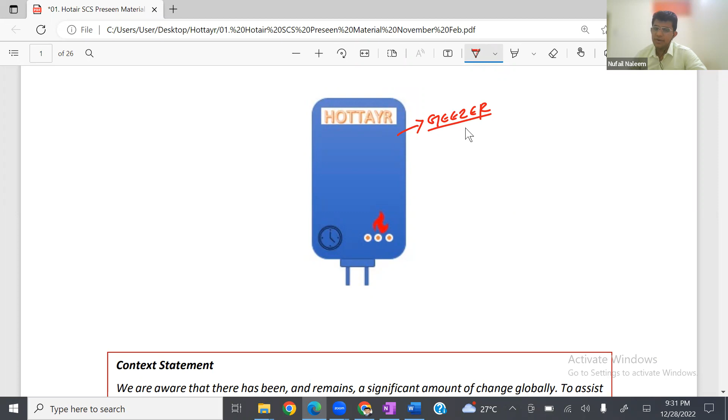So Hottayr, they have given a basic example of a heating system. This is like example, they say geyser. If you see in certain houses, especially in the Asian continent, they have something called geyser. Geyser means it will translate cold water to hot water. It's a basic device, so that is what they have given.

As I clearly told you, they are not wanting you to write anything that is associated with today's world. For example, in today's world we have COVID emerging once again from China, but actually that's not relevant for us, because our main target should be what are the data given. But anything that is relevant, you can write it down for your understanding.

Now students, as I told you, if you see the biggest challenge, if I'm not mistaken, is the explanation of scientific data. If you observe students, in management case study or operational case study, the data is mostly financial data, like statistics, everything. But here they are a little bit concerned about the scientific data also. I'll tell you the reason.

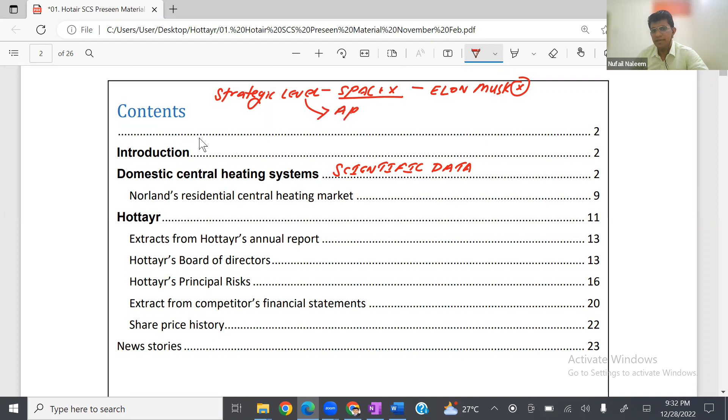If you observe students, in real life at the strategic level, let's assume you are working in the strategic level for SpaceX, which is Elon Musk's company. When you are working in SpaceX with Elon Musk, you need to at least know a basic idea of what work you are doing, so that the management will be comfortable with that. And similarly, even if you are working for someone like Apple, Steve Jobs or Tim Cook or anyone, you need to know about the scientific data as well. And don't worry students, scientific data doesn't mean that you need to be a specialist of science or anything like that.

So students, I'm going to go through this in detail. Now, introduction: Hottayr is a quoted company that manufactures domestic heating products. So once again, it's very clear it is a quoted company that manufactures. Understand it very clearly students, manufactures, that means they produce domestic heating products.

Now when it comes to manufacturing sector, the biggest challenge in manufacturing sector that we always know is pollution. Now you need to be having some awareness about pollution, students. And if you don't mind, I'll write down a small technical area that you can revise at the moment, that is known as IR, stands for Integrated Reporting. Students, I will guide you on this topic, don't worry, but please write these topics in a paper or something, because integrated reporting has been tested in the examination for the last time and the previous time also. So have an understanding of this.

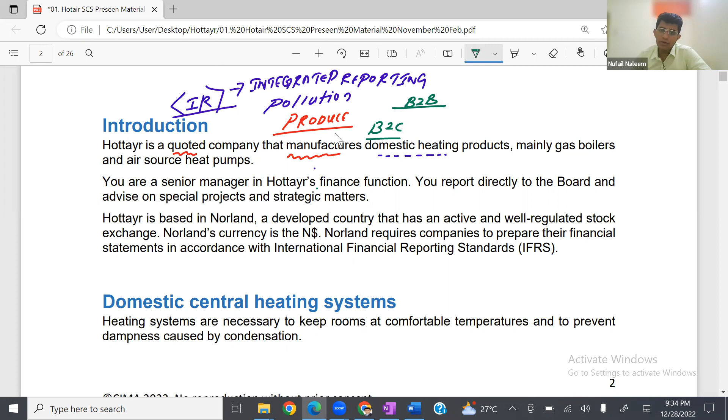And also students, just make sure that we will complete this SWOT also, and domestic heating products. So it is very clear that they are targeting the domestic heating only. That means they are not at all targeting the corporate, or I can say the industrial heating, because B2C, in simple language, means the product is effectively going to the consumer. But there can be B2B also, if I'm not mistaken. Instead of domestic heat, you can also make industrial heating system also. Industrial heating system is also possible in that aspect.

Now, mainly gas boilers and air source heat pumps. So these are the two products that they are selling at the moment. One is the gas boilers and the other one is air source heat pumps. Observe it very clearly, students. Technical term is air source, that means these heat pumps generally consume air and then only create the heat. So students, it's air source heat pumps.

Now students, have you heard something called air quality? I think Mr. Keetheeswaran would have experienced in Sri Lanka recently, the air quality reduced. Can you remember, Mr. Keetheeswaran, if I'm not mistaken? So what happens is these heating pumps will generally take the air from the atmosphere.

If the air is polluted, can there be a chance that the household also may get polluted air inside? Yes sir, if the air quality is bad, like in Delhi during this December time, the air quality will be extremely pathetic because of the farmers burning their harvest.

So students, can I get a confirmation from you all in the chat box if you are able to understand these things? So what I will do is write it down, and I'll do a very short SWOT. In case if I miss something, please let me know. So I'll write down here, quoted company is one thing.

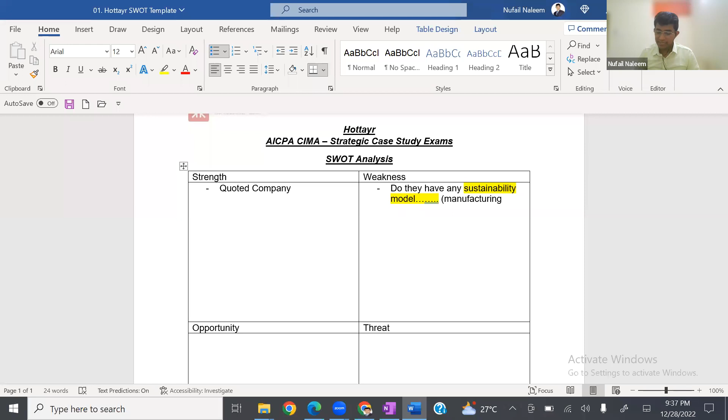And the next thing, I'll write down within bracket, manufacturing, because that is very critical students, because they are just giving factory data only, but they have not given any specific data going into detail of this. And one more weakness I can only say is only two ranges of product portfolio at the moment. So that is a dependency threat, I can generally say, only two ranges. So they will have a bigger challenge also, if I'm not mistaken.

Now if you see Honda, they have motorbikes, cars, scooters, so many varieties. But if you look at a company like Volvo, they generally have bus and I can say car. You get the point, students? So get the understanding, they need to have a more detailed aspect of that.

So you are a senior manager in Hottayr's finance function. I'll just underline this term. You are a senior manager, Hottayr's finance function. You report directly to the board and advise on special projects and strategic matters.

Now students, since I think one student has gone through the case study material properly, they have revised the past papers also. You need to refer the past paper, students, at least one past paper minimum. One question and answer also, you will understand a huge thing. So students, if you see, you are whom? You are senior finance manager.

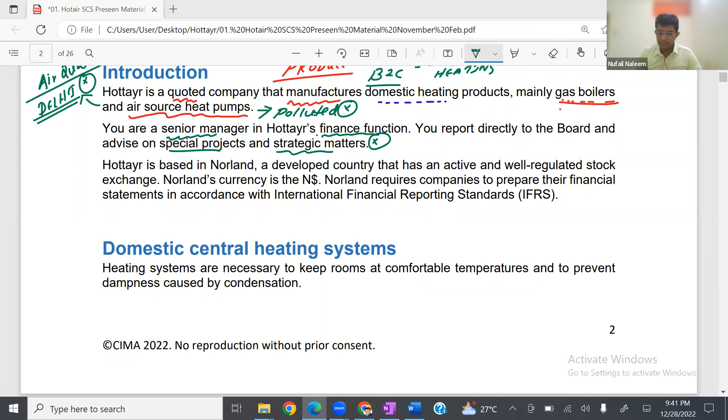Now, if you observe, Hottayr is based in Norland, a developed country that has an active and well-regulated stock exchange. Norland's currency is in dollars, and Norland requires companies to prepare financial statements in IFRS. So, one opportunity is that Norland is a developed country.

Now one threat in a developed country is more compliances and regulations. Norland may have more compliances and regulations. In a country like India, there are fewer regulations or compliances. So the downside risk of a developed country is more compliance and regulation. The biggest challenge in a developed country is more compliances and regulations. Even in the UK, the regulations are very high and it's not easy, if I'm not mistaken, Priscilla? That's correct, sir.

That's the downside risk of a developed nation, because it's not so attractive for a business. Now, domestic central heating system - understand this very clearly, this is industry analysis. Many students think industry analysis means doing real life industry analysis, but no, you need to analyze the data given specifically on the industry factor.

Domestic central heating system. In certain auditoriums in India, you will observe air conditioning attached to the ceiling - that is centralized air conditioning, where you control the temperature by one controlling system. Here the logic is the same, but instead of giving cold air, it gives warm air. Are you understanding the linkage between an AC and a heating system? Especially Asian students, make sure you understand this way of thinking, because it's the same logic as an AC, but here it is application based.

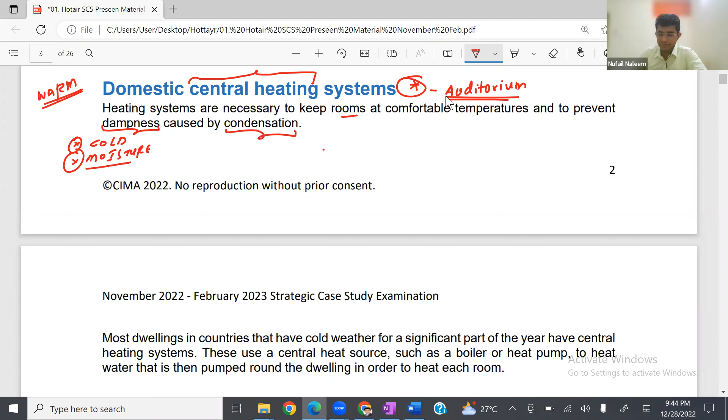Heating systems are necessary to keep the room at comfortable temperature and to prevent dampness. Dampness means it becomes extremely cold and moisture takes place, so everything becomes wet. For example, during extreme rainy times, you will see the windows have mist - that is the dampness caused by condensation, meaning excess moisture in the air.

Most dwellings means houses, students - see how they complicate the language. Dwelling in simple language means houses, apartments, all those things. In countries that have cold weather for a significant part of the year, they have central heating systems. These use a central heat source, such as a boiler or a heat pump, to heat water which is then pumped around the dwelling in order to heat each room.

Now I will explain this idea very clearly. Have you heard of the scientific concept called the water cycle? In the water cycle, rain takes place - let's assume this is the cloud, the rain flows into the earth, and from the earth the water goes to the sea. From the sea, there is sunlight, and this sunlight turns it into vapor, water vapor, and the cycle continues.

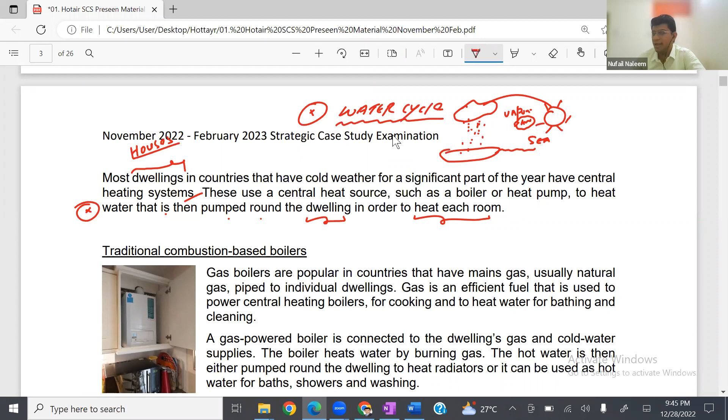So in simple language, students, the water heating system follows the same idea as the water cycle - can I get a confirmation from you all in the chat box? It's a direct replication of the water cycle scientific theory - it's just heating and circulating that moisture.

Now, students, coming to traditional combustion-based boilers - the word itself is traditional.

When you see the term traditional, the biggest risk these things are facing is updates of new technology. There are new technologies coming to the market, so there are updates of new technology also.

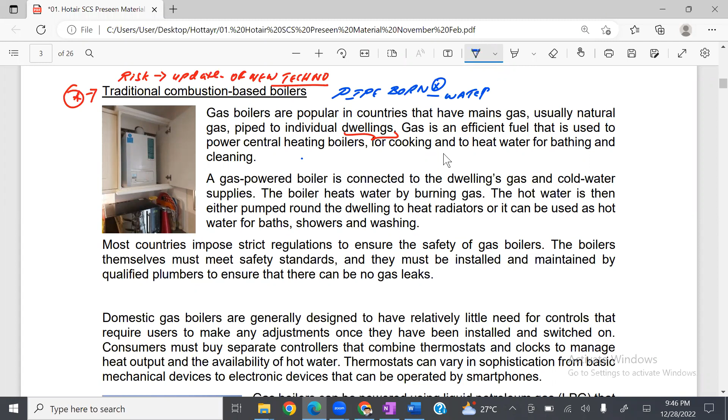Gas boilers are popular in countries that have mains gas, usually natural gas, piped to individual dwellings. In Asian countries we have pipe-borne water, meaning houses have a direct water connection through a central pipe. Similarly, in developed countries they have special gas pipes bringing gas to houses. In Asian countries we mostly use gas only for cooking, but in Western countries or places facing cold weather, they also use gas for heating purposes.

If you go to places like Nepal or Shimla, cold regions, you'll see people using a small gas cylinder to generate heat, since facilities are limited there. But in countries like Russia, Ukraine, and Western countries like the UK and America, they have proper central heating systems.

Gas is an efficient fuel used to power central heating boilers, for cooking, and to heat water for bathing and cleaning. These are the main purposes. Gas-powered boilers are connected to a house instead of just a dwelling, along with gas and cold water supplies. The boiler heats water by burning the gas.

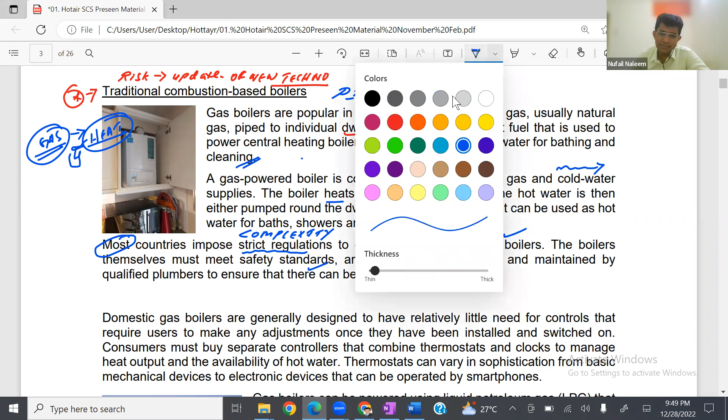There is complexity to ensure the safety of gas boilers. The boilers themselves must meet safety standards, and they must be installed and maintained by qualified plumbers to ensure there can be no gas leak. As per our track record, do we have any gas leaks recorded till date? No.

But can there be a gas leak because of unqualified plumbers, since the market can always shift? There can be a situation with unqualified plumbers leading to a gas leak. Is that a sensitive issue? Yes, a gas leak is a sensitive issue because the entire house can blast as well.

Gas leaks can occur due to poor industry standards. I mentioned developed countries have more regulation, so the heating industry is highly regulated, meaning not everyone can start this business. If you want to start this business, you need very strong standard compliance.

Domestic gas boilers are generally designed to have relatively little need for controls requiring user adjustments once they have been installed and switched on. The main reason is it is centralized, so there's no need to work so hard.

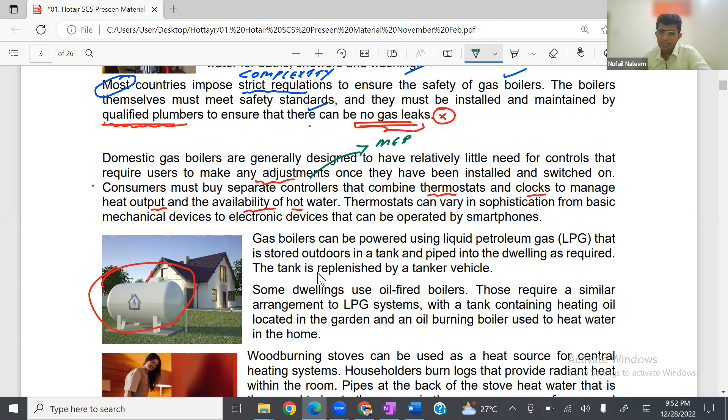And students, have you heard about something called IoT? What is IoT, students? Internet of Things. That means you use Bluetooth technology and Wi-Fi technology to connect devices and integrate devices. Correct, Anushka? Yes, sir. So Bluetooth and Wi-Fi.

Now, students, can there be a situation where controllers can be downloaded by an app? Possible or not possible, students? Of course, right? You can control it from your mobile phone also. So students, if you do not mind, can I write it down so that it will be very clear for you all?

So one opportunity is we can acquire a heat control company, and also we can develop our own heat controller. Can you remember, Monica, there was a case study called Frinta?

I think you did that, right? Management case study, your one was Frinta? Yes, sir. In Frinta, they produce what? Heat controller, sir. But they don't produce the heat. Are you now clear?

Yes, sir. So super. Were you able to integrate this point in your initial reading? Yes, sir, I did. I wrote how we could start our own, like instead of acquisition, I wrote how we could start our own. Internet of Things, everything came right into the mind.

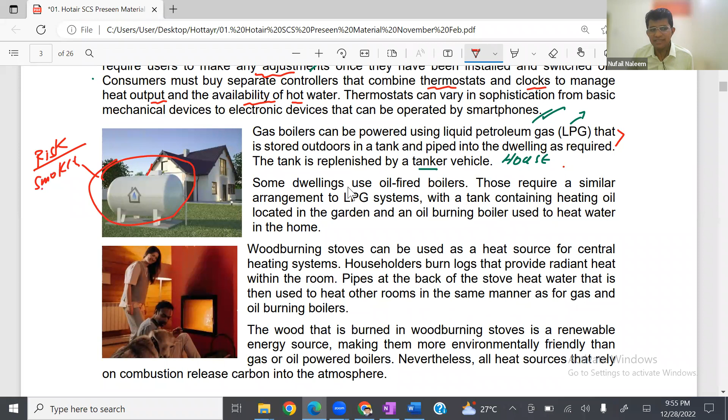And I want to ask a question, students. Now, this is kept outside, right? So there can be risk also. Example, Anushka, let's assume someone smokes and just puts a cigarette by mistake from somewhere, and there is a chance this can burst. Burst, possible or not possible? Possible. In that case, are we liable or is someone else liable?

Now something happens like that. A very strategic question. First they'll blame us, sir. Definitely. So students, can I write down, if I'm not mistaken, third party accidents can happen to the gas boiler outside the house.

Students, this is a very different case study. I believe many people are having an eye-opening session today, getting that thinking very clearly. Some houses, I am always transitioning the dwelling into houses, use oil-fired boilers. Those require a similar arrangement to the LPG system, with a tank containing heating oil located in the garden, and an oil burning boiler used to heat water in the home.

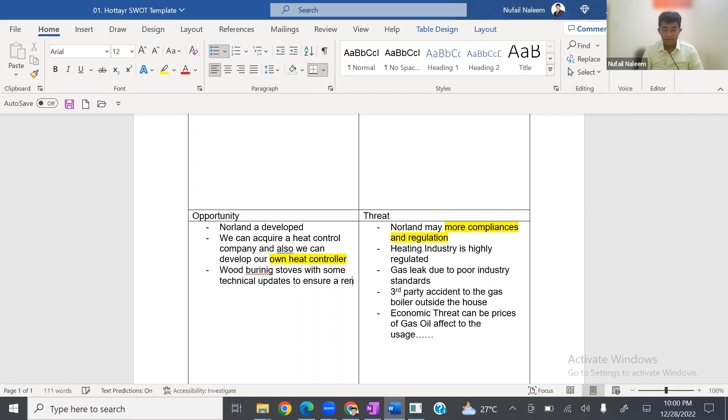So can I write down one thing, if I'm not mistaken, students? One opportunity we have is wood burning stoves with some technical updates. We can have some technical updates to ensure - I can specifically write down here - to ensure a renewable energy process. Renewable energy process. Students, are you clear with that point of view? Can I get a confirmation from you all in the chat box if you got that point? So that is one opportunity. Actually we can target this also - we can promote it as integrated reporting, CSR activities, something like that, and we can effectively go forward. So that is one factor.

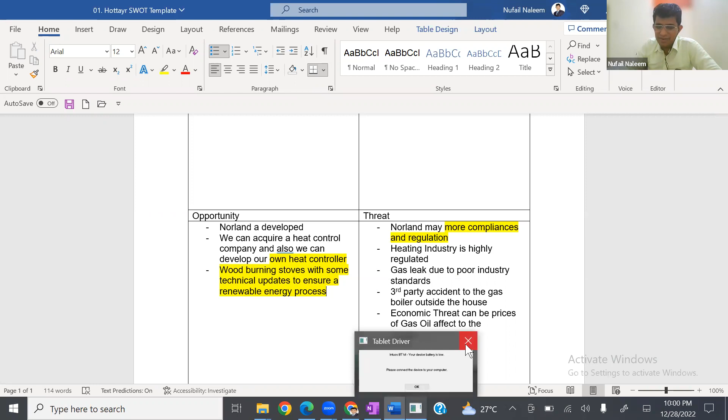Now students, coming forward, going to the next one. Sir, I didn't understand, could you explain it? Yeah, now if you observe, it's very clear that wood burning stoves are renewable energy. Yes sir, gas is not a renewable energy. Gas is a thermal energy. Thermal energy means once you use it, you can't use it again - like petrol, once only you can use. Okay, but here they are saying wood burning stoves are renewable energy.

But are we having wood burning stoves at the moment in our portfolio? No sir. So can this be another opportunity for us to go forward in business? Yes, and also this can be a marketing tool also, where we can attract many people saying that we are having a renewable energy source rather than a thermal energy source. Students, can I quickly get a confirmation from you all in the chat box if you understood that basic point of view?

So frankly speaking, until now I can say this industry is a complicated industry, not an easy industry - very tough and highly regulated industry. Distributing heat around the homes, how it works out - now only they are using the term homes. A network of pipes made from either copper or plastic carries hot water from the boiler to each room in the dwelling that is to be heated. So in simple language, students, it is having a fully heat-resistant system where the pipes are carrying the water for the heat, because the water is only getting evaporated and giving off the heat.

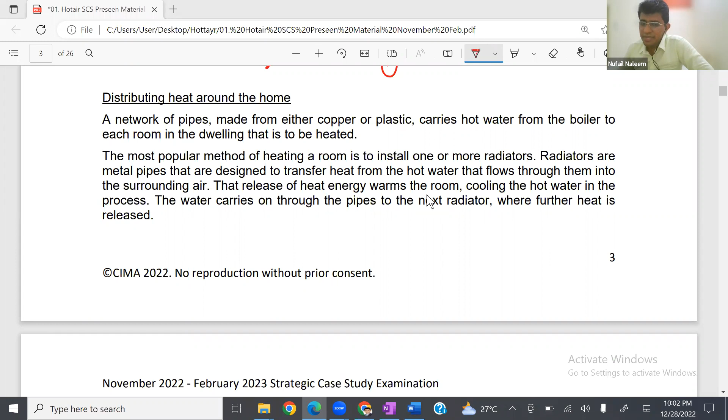Most popular method of heating a room is to install one or more radiators. Radiators are metal pipes that are designed to transfer heat from hot water that flows through them to the surrounding air. Now, my question once again - do we produce radiators in our company? No sir. So students, can I write down - no, we don't produce radiators. Can there be a situation, Anushka, our product is wonderful but the radiator is horrible? They are not getting sufficient heat. Can there be a situation like that? Of course, yes sir. So students, if you don't mind, can I write down one more point if I'm not mistaken?

Problems caused by the radiator. Students, are you understanding what I'm saying? Affecting the reputation of - I can generally say - the Hottayr. Students, look at the way it is going forward. Can I get a confirmation from you all in the chat box how it is also done? And one more opportunity we can have is production of radiators.

Or another thing is, can we have a JV, a joint venture, with a good radiator? So, one more thing: we don't produce controllers, we don't also produce the radiators. So there are situations where these things can happen as well.

Now moving into the detailed aspects, the release of heat energy warms the room, cooling the hot water in the process. The water carries on through the pipes to the next radiator where further heat is released. So students, understand it clearly: the pipes are like this, inside the pipes there is a radiator, this will boil the water, and then again there will be another radiator in the room, and it will boil the water.

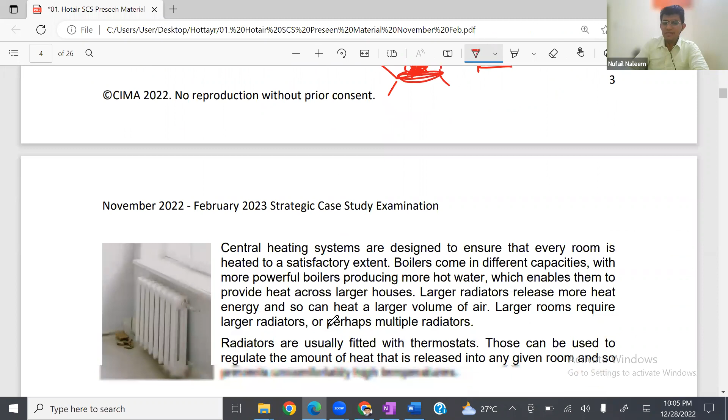So coming to the next one: central heating systems are designed to ensure every room is heated to a satisfactory extent. Boilers come in different capacities, with more powerful boilers producing more hot water, enabling them to provide heat across larger houses. Larger radiators release more heat energy, so there can be heat across larger areas. Larger rooms require larger radiators and perhaps multiple radiators. So the problem is, bigger the house, bigger the carbon emission.

What do you think, students? Yes or no, bigger the house, higher the carbon emission? Do you agree with me, Anushka? Yes. So students, understand it clearly: bigger the house, higher the carbon emission. I believe everyone is getting this understanding very clearly.

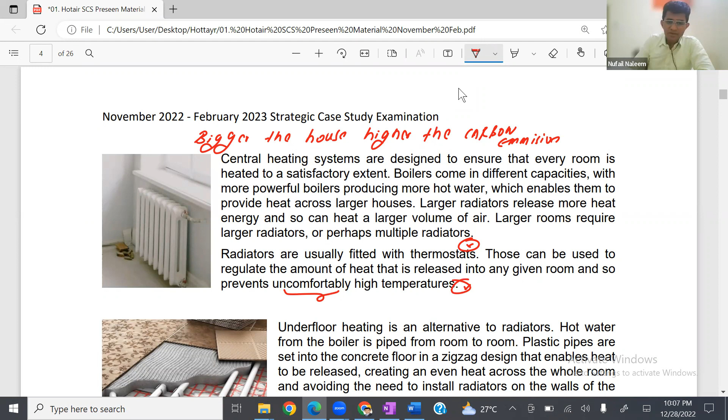And radiators are usually fitted with a thermostat, as I told you, that is the controller. This can be used to regulate the amount of heat released into any given room, to prevent uncomfortably high temperatures. So students, that is the effective application of this. So I'm going down, these are the pipes, I believe you can see this, this gives the heat.

Example, Anushka, in your house have you opened your oven? Have you seen an oven? Inside the oven, have you seen these items? I have seen, sir. This is what I can call the regulators. Students, can I get a confirmation from you? If you have an oven in your house, observe how the oven gets heat. The oven has the same devices. Get it very clearly, students.

Technological analysis: now students, I'm going to cover underfloor heating, which is an alternative to radiators. Hot water from the boilers is piped from room to room. Plastic pipes are set into the concrete floor in a zigzag design to enable heat to be released, creating even heat across the whole room and avoiding the need to install radiators on walls. The pipes are embedded in the floor, so they cannot be seen and can be walked across without causing any damage. The floor can be covered with conventional floor covering, although carpet tends to insulate and so reduces the heat effect.

Now, one thing I am observing, Anushka, and I think Reshma also can observe, these facilities are only applicable for very rich people. What do you think, Anushka? In practical terms, do you think every house will have the affordability to go to these ranges of technological heating systems? Frankly, I don't think so.

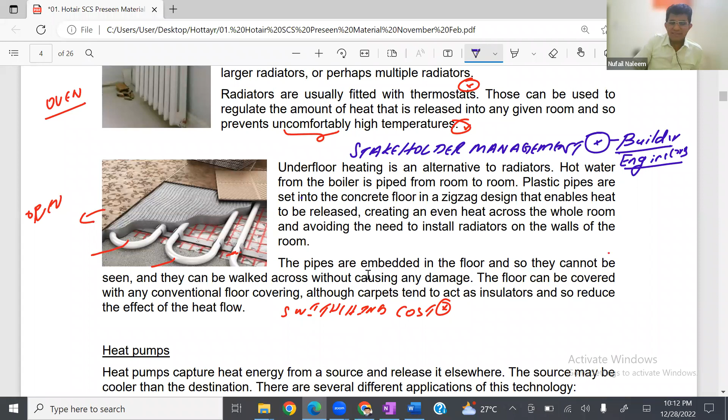And that is the biggest thing I can generally say. So I'll just write down another point of view, if I'm not mistaken. Another - I can be very practical in this case - is generally, since the process of heating facilities are complicated, the customer rarely switches.

I will give you a very, very Asian example. Now, Anushka, have you observed bathware in houses? Like bathware, the tub, the comfort. Do you think people easily switch that, or they keep it for a long time, right? If I'm not mistaken, costly also, very expensive also. So that is the understanding.

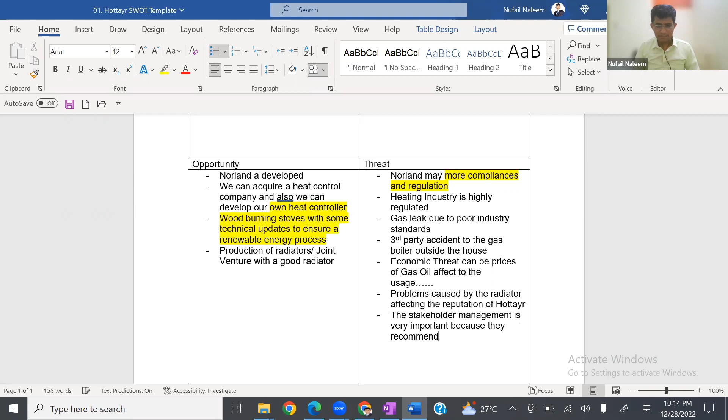So students, and one more thing, if I'm not mistaken, I'll just write down another thing: the stakeholder management is very important. It's very important because they recommend the products. Now, Anushka, in simple language, cement - you are building your house.

The cement industry - I am 100% sure 70% of consumers don't know cement. This goes with the builders only.

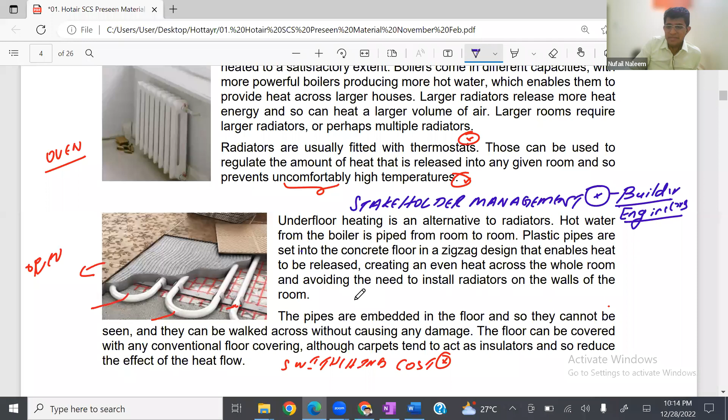So students, we are effectively done with the heat boilers. I'm going to go for the heat pump now. Are you okay with the heat boilers? Can I get a confirmation from you all in the chat box? Students, I want to do a small summary, if you don't mind.

So I'm going to write down here product decoding, because you need to know a little bit of the product information. It will help you to think a lot - that's very, very important. So I'm going to go with the first product decoding.

What we are going to do is the gas boilers, correct? Now understand it very clearly. Gas boilers - if you observe, gas is the source of energy, but we have alternatives for gas boilers, that is oil boilers. Agree? Alternative for gas boilers is oil boilers.

So students, I'll write down here another term for alternative, oil boilers. Can I get a confirmation from you all if you are clear with that point of the oil boilers? And one thing I told - economic risk is affecting these main things. Gas and oil is not produced in our country. We don't have energy sources as per the information given. So understand it clearly, high emitting it is.

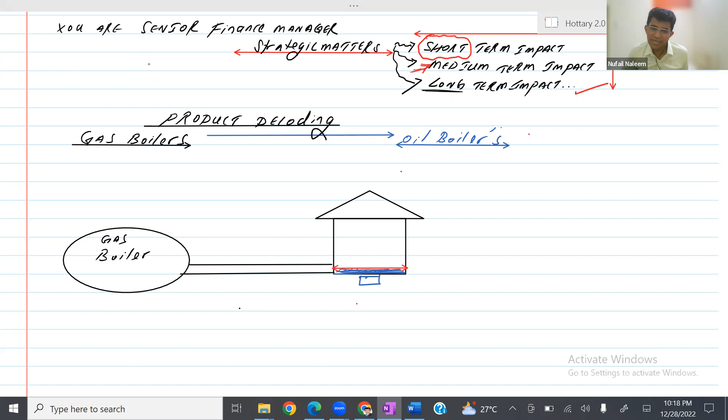Now students, understand it very clearly. There needs to be a regulator. Regulator is the device that will segregate water and heat, balance and generate heat capacity - it is the energy developer. Water will be there, gas will be flowing, but this device will control it. And every house will have a thermostat. This is the controller. So this is how the process works and the heat energy is developed.

Now, if you observe, our company only produces gas boilers. And if you observe in this case, this is independent, correct? And even the controllers are independent. Students who have done MCS, this is only thermostat - this was the case study that you did earlier. And again, these are independent students. And another best way is something called wood burning stoves.

So I'll just write down in the corner, wood burning stove also does the same thing, but instead of gas, what do they use?

Instead of gas, wood will be used. So I'll write down here: wood burning stove.

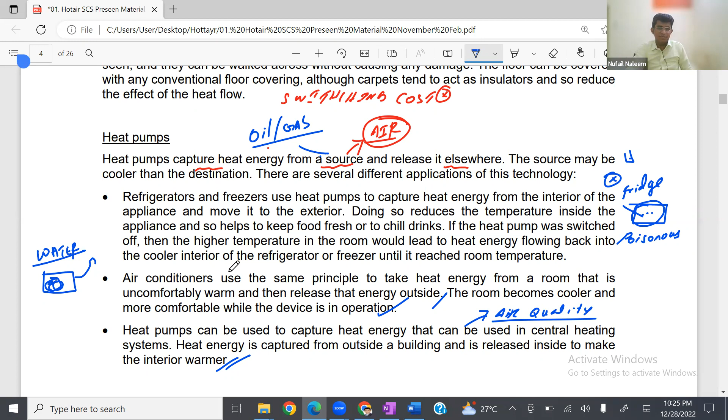Heat energy is captured from outside a building and released inside to make the interior warmer. Now, the problem is when you capture heat from the outside, what about the air quality? There is a technical risk. If the air quality is good, like in the UK, that's completely fine.

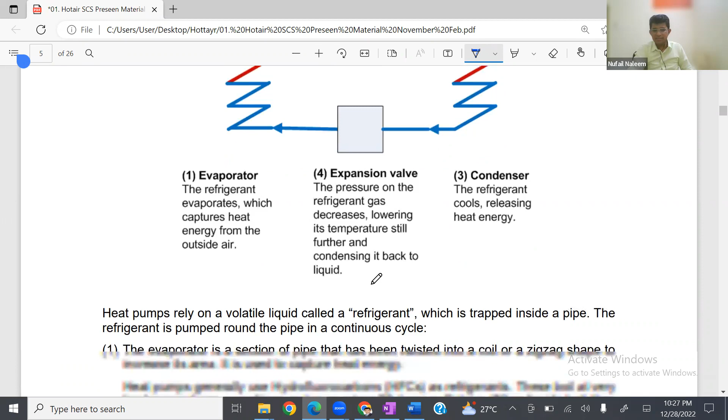So students, the biggest challenge in this process is: is it possible to capture heat energy in winter? Are you understanding what I'm saying there, students? Are you getting the point of view? Is it possible to capture heat energy in the winter? Are you understanding the biggest challenge that we are having? So students, get that point of view, because in extreme cold, I don't think it will be possible. Students, can I get a confirmation from you?

So students, can I quickly get a confirmation from you all in the chat box if you are getting some basic point of how the process works out? Thank you. So, could you just explain how the evaporator works, sir?

Okay, the first one, the evaporator. Now what happens is I'll guide you very simply. Let's assume you have drinking water. Water is liquid, correct? If you put water into the freezer, what will happen? It will freeze and become solid, an ice cube. And the ice cube, what happens is, students, it ends up as solid.

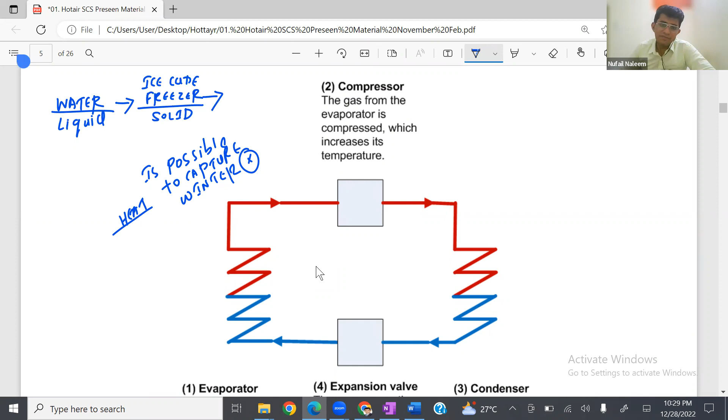And then again, you take it out from the refrigerator, and it again becomes water, correct? Are you clear with that?

Now the same water, if you heat it, it ends up as vapor, gas or vapor. Have you observed, when people become sick, they say steam it, they steam everything, again water is used and heat is converted. You would have definitely used steam when you have a blocked nose or headache like that. So what happens is the gas vapor comes. Evaporation is the transition, understand it very clearly. It takes the heat, it takes the gas, that is the air, which is in the normal atmosphere.

What happens is the evaporator stores the air, let's assume something like nitrogen or oxygen, it stores it. And the air is inside this, and if you want to give heat to air, this air needs to get heat energy. Hot air comes outside.

Another example I can give you is hair dryers. Have you used hair dryers? Now, if you generally observe, are you getting cold air or hot air in the hair dryer? Hot air. How does hot air come in the hair dryer? The hair dryer captures the air which is outside, and the motor heats the air and gives it to you as hot air.

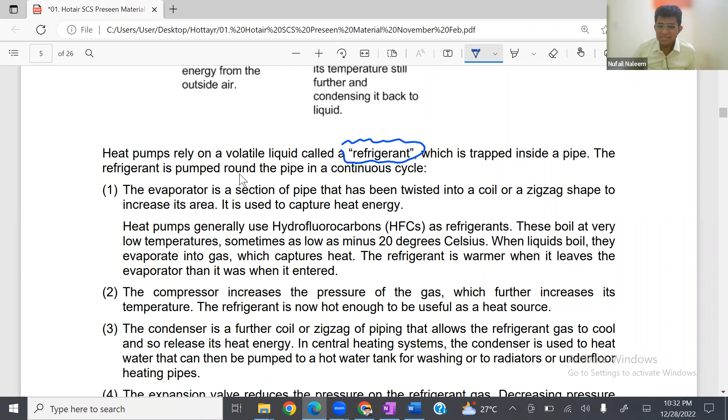Now, heat pumps rely on a volatile liquid called refrigerant. It's poisonous, so students understand it very clearly. A heat pump has refrigerant because refrigerant is there in an AC or a refrigerator, because refrigerant is generally a poisonous gas, and this poisonous gas is the source of conversion. This converts the normal gas into cold, or I can say heat, which is trapped inside a pipe.

The refrigerant is pumped round the pipe in a continuous cycle. The evaporator is a section of the pipe that has been twisted into a coil or zigzag shape to increase the area. It is used to capture the heat energy. Students, observe it very clearly, do you see here the zigzag area? So that effectively captures the heat energy, they are saying.

The heat pump generally uses hydrofluorocarbons as refrigerants. These boil at a very low temperature, sometimes at -20 degrees, so it can go to -20 degrees also. This is the maximum capacity. When liquid boils, they evaporate into gas. Can you remember the water example I told you?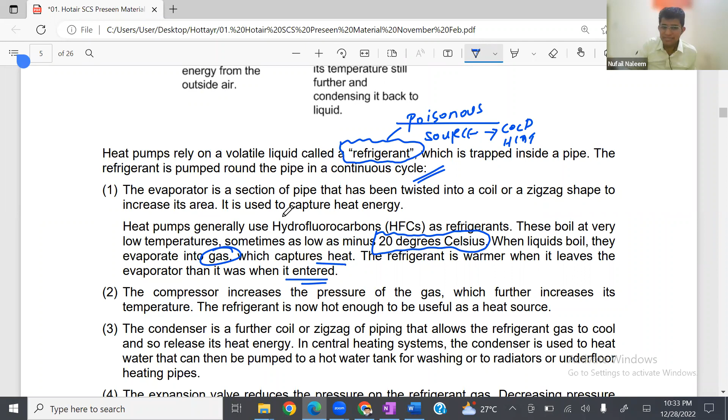Which captures the heat, the refrigerant is warmer, when it leaves the evaporator than it was when it entered. So it is a model that exercises the process of conversion. The compressor increases the pressure of the gas, that means it is controlling, it is blocking the gas, which further increases the temperature. The refrigerant is now hot enough to be useful as a heat source. This compressor will store all the gas and heat it as much as possible.

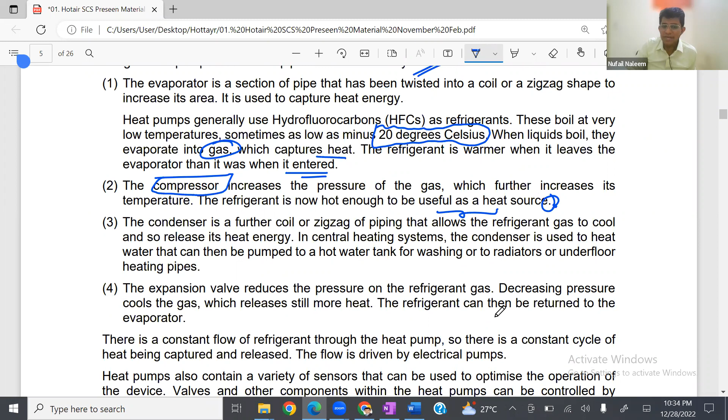The condenser is a further coil or zigzag of piping that allows the refrigerant gas to cool, so release its heat energy. In a central heating system, the condenser is used to heat water, and this can be pumped to hot water tanks for washing, radiators, underfloor heating. Once again, this is the condenser, this generally makes sure the water or the heat is slowly taken out.

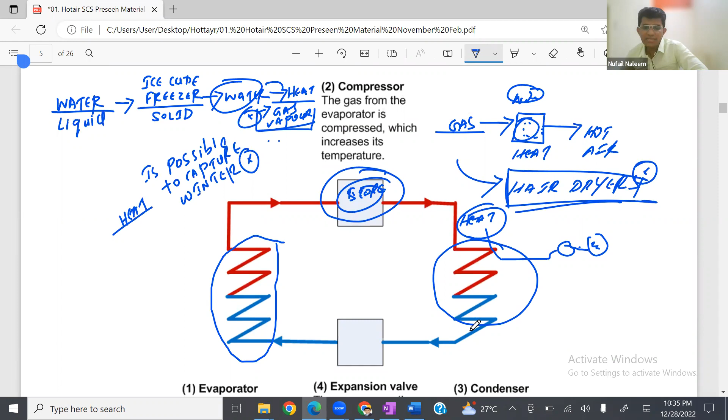The expansion valve reduces pressure on the refrigerant gas. Decreasing pressure cools the gas, which releases still more heat. The refrigerant can be returned to the evaporator, so it is a cycle. Students, can I get a confirmation in the chat box if you understood how it works out? But remember the four major things: evaporator, compressor, condenser, and the final one is the expansion valve.

The expansion valve controls the condensed items. Students, there is a constant flow of refrigerant through heat pumps, with a constant cycle of heat being captured and released. This flow is driven by electrical pumps. Heat pumps also contain a variety of sensors that can be used to optimize the operation of the device. Valves and other components within the heat pumps can be controlled by electronics connected to those sensors to improve the heat output.

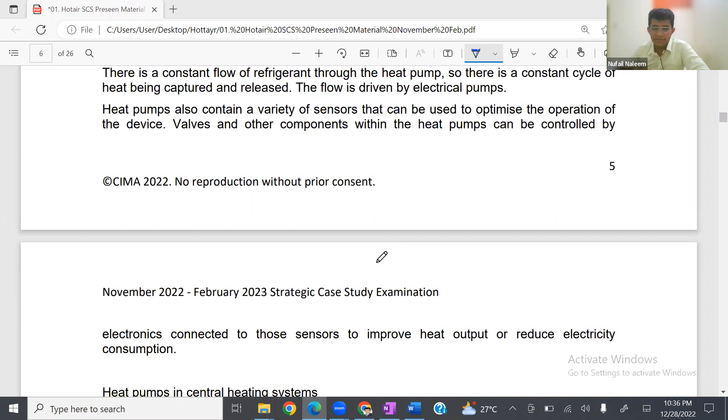Now, one more thing, Anushka, do we have electrically connected sensors? Do we produce that, or only the heat pumps produce heat? So again, students, I'll write down here: components for heat management, not yet produced. That is one more factor, students. Just understand it very well.

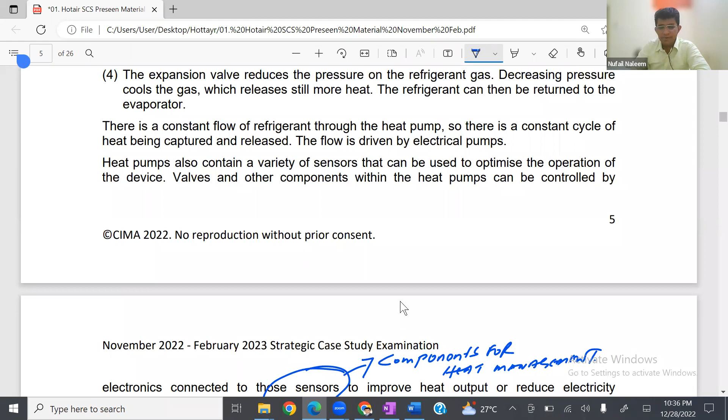Now, students, heat pump in the central heating system. Before going to that, what I wanted to do is a small analysis of the heat pump in simple language. So I'm going to write down heat pump here. Let's start doing a small analysis. Students, can I get a confirmation if you can see the screen? Heat pump. Yes, sir.

So students, again, understand for heat pump, you need not have a boiler outside or anything. It is similar to AC, correct? And what happens is, instead of cold air, it gives you hot air. Are you understanding the logical idea, students? Are you clear with that? Yes, sir. So heat pump in simple language is an AC, but it is giving you hot air.

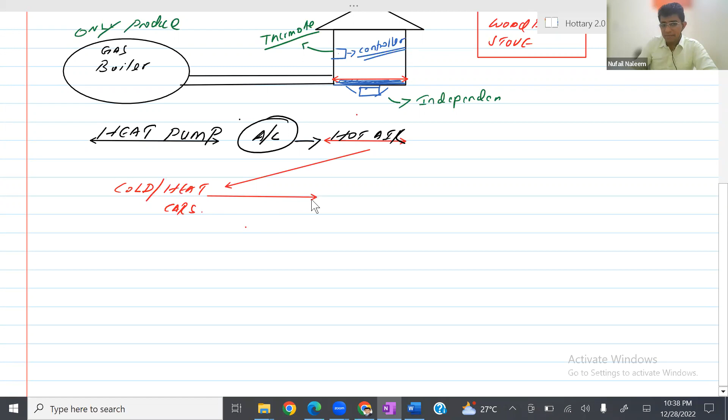Now I'll tell you the logical application. Anushka, in certain cars, you may have the cold function and the heat function. Have you observed that? Yes, sir, cold and heat functions will be there in cars. So students, this is the technology that they use even in cars also. But the biggest challenge is, although they generally say it captures the energy from the normal air, it has something called refrigerants. Can I write that down, students?

Refrigerants - I'll write down here hydrofluorocarbon, which is a poisonous substance, and it can cause environmental issues if they are released into the atmosphere. Can I get a confirmation from you all, students, if you understood that? But just remember the idea very clearly: heat pump is very similar to AC. That is the final idea.

And just to make it even easier - one zigzag is evaporator. Agree, students? Yes, sir. The other zigzag, if I'm not mistaken, is the condenser. Correct, students? Yes, sir, condenser. And here there is something called compressor. And here, if I'm not mistaken, that is the valve, right? What was the name, students? Expansion valve.

Okay, what I will do is guide you in a more simple manner, for your understanding only. Now, Anushka, have you seen in an AC there is a valve where the air comes out? Have you observed that? If let's assume this is an AC, from where does the air come out? From the valve. You understand what I'm saying, students? Yes, sir. Now observe the logic clearly - it comes from the valve.

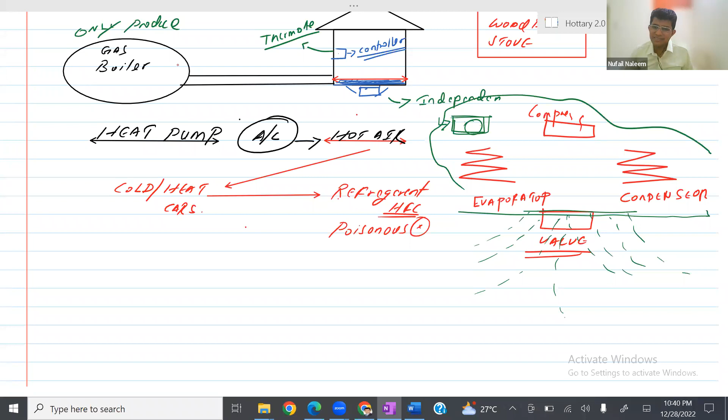Now, what happens is, students, outside the house, there will be a small type of - I can say that is the condenser. Because when you switch on the AC, students, outside the house, there will be a fan working. Correct, students? Yes or no? So that fan does all this work. It connects everything, and then the air is coming back. Thank you. So, students, now coming to the next one.

Heat pumps in central heating system. Heat pumps are alternatives to boilers as heat sources for central heating systems. A heat pump's evaporator can be located outside of a building - again, understand the logic - where it captures heat energy during the cold weather. Did you understand this, Anushka? Yes or no? This is evaporator. Are you clear? The valve is the thing that releases the gas energy.

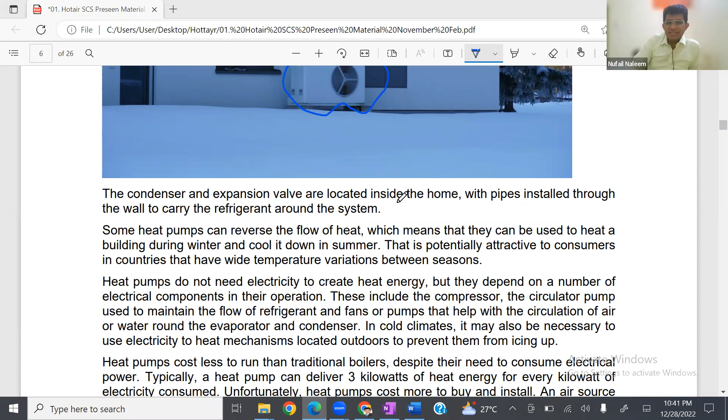So condensers and expansion valve are located inside the home, with pipes installed through the wall to carry the refrigerant around the system. Some heat pumps can reverse the flow of heat, which means they can be used to heat during the winter and also cool during the summer. So I can say this is a good investment. What do you think, Anushka? Yes, sir.

Because this is a hybrid function, I think this is one big factor that is good about heat pumps, potentially attractive to consumers in countries with wide temperature variations between seasons. Heat pumps do not need electricity to create heat energy, but they depend on several electrical components in their operation. This includes the compressor, circulation pump used to maintain the flow of refrigerant, and fans or pumps that help with circulation of air or water round the evaporator and condenser.

In cold climates, it may be necessary to use electricity. So practically speaking, in the cold you will not be able to capture heat energy, agree? So you need to use electricity to heat mechanisms located outside to prevent them from icing up. So electricity is needed during cold times, meaning energy consumption is there.

Heat pumps cost less to run than traditional boilers, despite their need to consume electrical power. So your electricity cost will go up. Typically, heat pumps can deliver 3 kilowatts of heat energy for every kilowatt of electricity consumed.

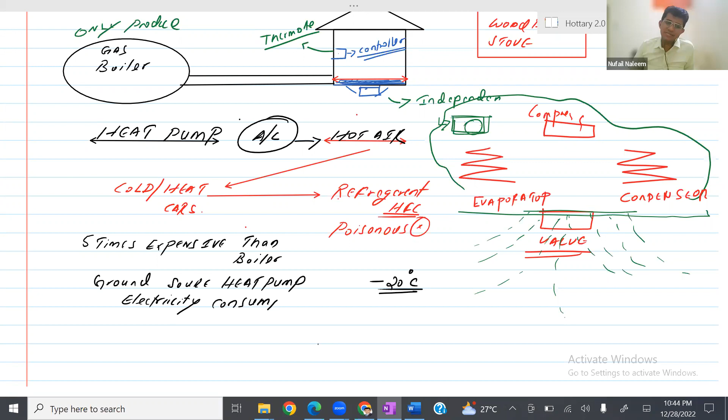So Anushka, can I give you an Indian example so it will be easy to understand? Have you seen there are 2 types of cookers? One is known as the gas cooker, meaning you need gas in order to cook. The other one is known as the induction cooker, which works on electricity. So the basic idea is gas cooker versus induction cooker: this one mostly goes with electricity, and this one goes with gas. They may have their pros and cons, but 5 times expensive is a big challenge, students.

Big challenge. Moving to the next one: heat pumps capture heat energy from the environment that is supplied by the sun. There is no combustion, so no carbon emission. So that is only possible during the summertime, correct? Because sun energy you can only take using what time?

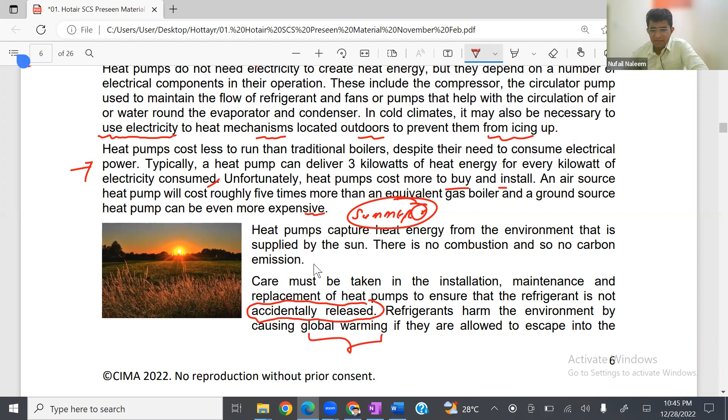Summer. Care must be taken in installation, maintenance, and replacement of heat pumps to ensure that the refrigerant is not accidentally released, because that is a very poisonous substance. Refrigerants harm the environment by causing global warming if they are allowed to escape into the atmosphere.

So students, can I mention, is that a bigger issue or threat? Yes or no? A bigger threat, because at the end, even if the customer by mistake does anything wrong, effectively the blame goes to the company. So can I write down one fact in simple language: refrigerants releasing into the environment causing severe environmental damages. I believe that is very clear for everyone. Can I get confirmation from you all in the chat box if you get that clearly?

However, it is possible to drain refrigerant from old heat pumps into sealed tanks for reuse and safe disposal. So that must be a policy that needs to be conducted by the organization as well.

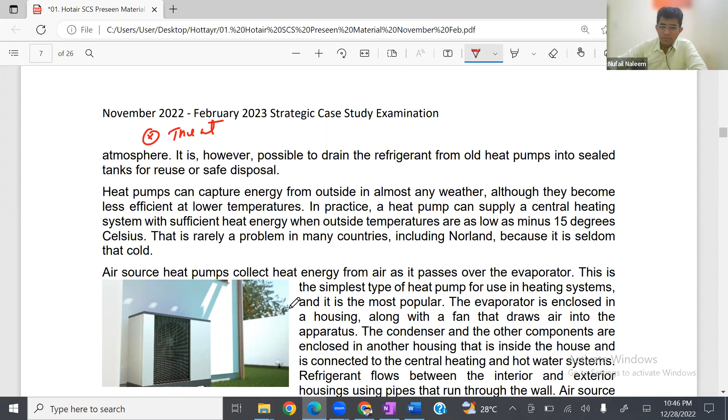Now moving to the next one: heat pumps can capture energy outside in almost any weather, although they become less efficient in lower temperatures, as we already know. In practice, heat pumps can supply the central heating system with sufficient heat energy when outside temperatures are as low as -15 only. That is rarely a problem in many countries, including Norland, because it is seldom that cold.

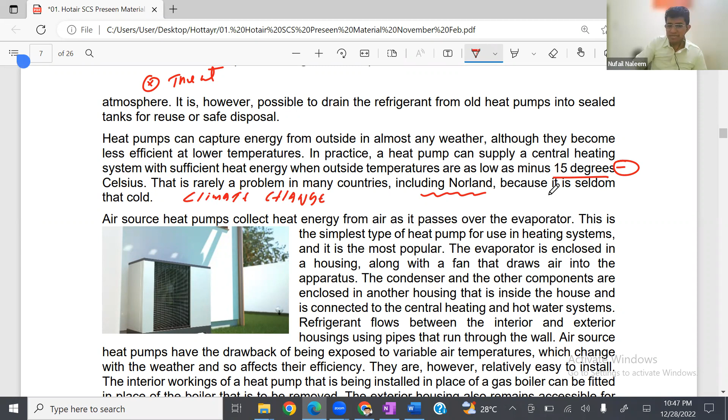Now they are saying that in Norland, until now, they have not experienced anything below -15. Are you understanding what I'm saying, Anushka? Yes sir, now the biggest challenge is climate change. Can there be an experience of climate change, Anushka? Yes sir, of course. So can I just write down, students, another classical problem is climate change in Norland. Students, can I get confirmation from you all in the chat box if you are clear with that point of view? Climate change in Nolan, because that is a very important point to keep in mind.

Now, students, the next thing is air source heat pumps, which collect heat energy from the air as it passes over the evaporator. This is the simplest type of heat pump for a heating system. Anushka, have you seen windmills? So windmills, what happens? It captures the energy from the air, correct? Yes sir. So the same logic is used here. Are you understanding what I'm saying, students?

The evaporator is enclosed in a housing along with a fan that draws air into the device. The condenser and other components are enclosed in another housing that is inside the house and is connected to the central heating and hot water system. Refrigerants flow between the interior and exterior housing using pipes that run through the wall.

Air source heat pumps have the drawback of being exposed to variable air temperature. Can you remember I told you about air quality issues? Because any air quality issues, which change with weather, affect their efficiency. They are also, however, relatively easy to install. The interior working of heat pumps, when installed in place of a gas boiler, can be fitted in place of the gas boiler and be removed. So one good thing is removal - shifting from gas boiler to heat pump is not difficult, very easy, same logic.

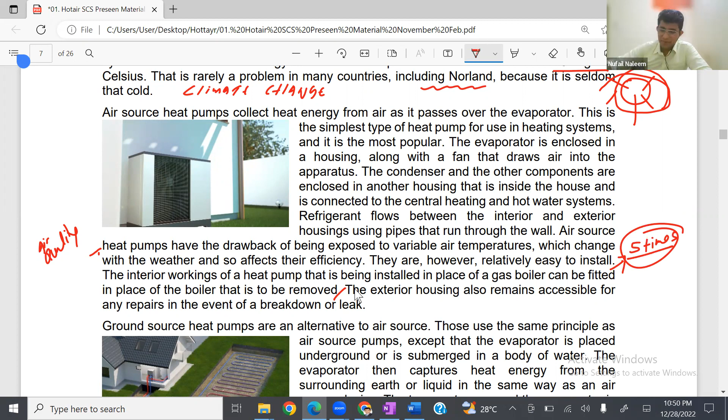But the biggest problem is, how many times is it expensive, Anushka? 5 times. Practically, is it possible to go for an investment 5 times expensive? No sir, practically challenging, unless you are very rich. The exterior housing also remains accessible for any repairs in the event of a breakdown or leak.

Now, students, if it is 5 times expensive, one thing I can write down here is government grant. Students, can there be a situation of a government grant? Yes or no? Yes sir. So can I write down here, students, government grant? Government will say, okay, no problem, everyone go for heat pumps, we will give you some allocation. So can I write down, students, one opportunity? In simple language, government grant provided to the general public to move to better heat energy. Students, are you understanding that point? Government grant is also a possible factor.

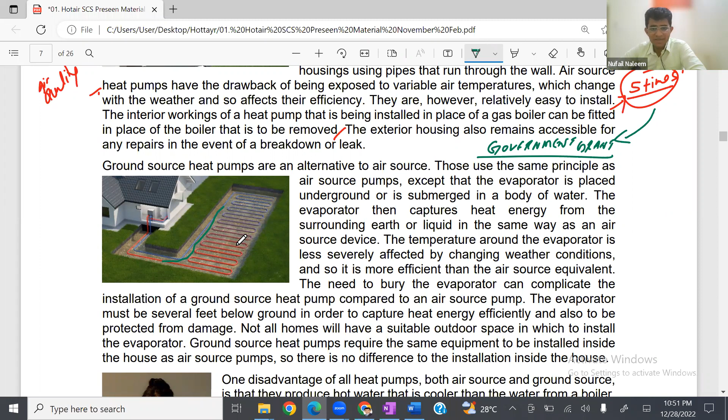Ground source heat pumps are an alternative to air source, and use the same principle as air source pumps. So this is the ground source. Again, do you see that oven type of thing is there? Yes sir, but it is connected to the ground. These use the same principle as air source pumps, except the evaporator is placed underground or submerged in a body of water. The evaporator then captures heat energy from the surrounding earth or liquid in the same way as the air source device. The temperature around the evaporator is less severely affected by changing weather conditions.

So they are saying it is less affected by changing weather conditions, but I have a bigger issue. The issue is, Anushka, can there be soil erosion? Yes sir. Fertility of the soil, can that reduce? Yes sir. Farmers coming and threatening that the soil quality is reducing, correct? Yes sir. So that is one factor.

And the need to bury the evaporator can complicate the installation of a ground source heat pump compared with the air source. And again, if the air source itself is 5 times expensive, ground source definitely will be more than that - more expensive. The evaporator must be several feet below the ground to capture heat energy efficiently and also protect it from damage.

Not all homes will have suitable outdoor space to install the evaporator. And can I ask you one question - is it possible in apartments? I don't think it is possible. Correct, no, Anushka? Flats, apartments, condominiums - no, right? Ground source heat pumps require the same equipment to be installed inside the house as air source pumps. So there is no difference in installation inside the house.

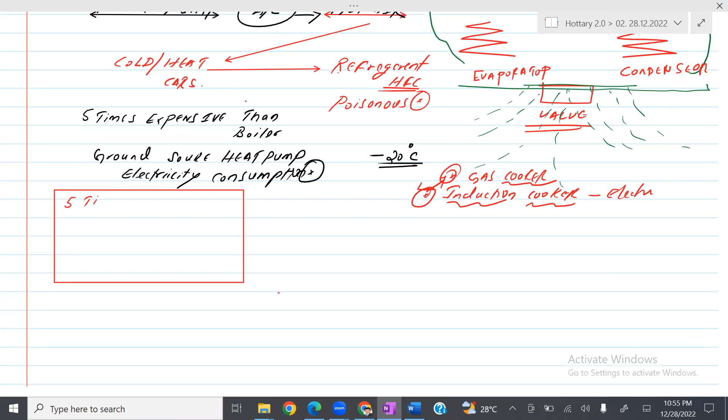So students, if you don't mind, can I just write down some weaknesses of the heat pumps so that it will be very, very clear for you. So sir, if I'm not mistaken, the biggest weakness is 5 times expensive. Agree, students, if I'm not mistaken? Yes, sir. 5 times expensive. And the other biggest weakness in simple language, after 5 times expensive, is 10 degrees less hot.

Agree, students, yes or no? Then, in simple language, more energy consumption. Correct, students, if I'm not mistaken? Yes, sir. More energy and lack of efficiency also. It's lack efficient also. So effectively, students, the case study of electric vehicle and the petrol diesel vehicle.

Students, can I quickly get a confirmation from you all in the chat box if you understood this very clearly? These are the industry statistics. It's not easy to make a transition. Not easy to make a transition. I'm going to the next one.

Alternative heating system. There are alternatives to boilers and heat pumps when powering central heating systems. So these are the alternatives. In the market, we need to know this also. One is the solar thermal panels. I think this is available in India also, Anushka, if I'm not mistaken. Yes, sir. You will be seeing in houses, apartments - all this solar thermal panel will be there.

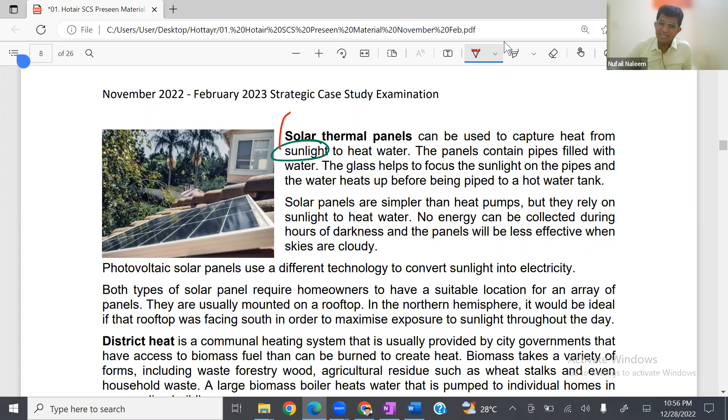Can be used to capture the heat from the sunlight to heat water. Now, the biggest challenge in winter - do you have sunlight? No, sir. That is the biggest issue because our point of focus is giving the heat in winter, not during the summertime. So the panels contain pipes filled with water. The glasses help to focus the sunlight on the pipes and the water heats up before being piped to a hot water tank. So once again, the source of heat is water or a refrigerant only.

So solar panels are simpler than heat pumps, but they rely on sunlight to heat water. No energy can be collected during darkness and the panel will be less effective when the skies are cloudy. Photovoltaic solar panels use different technology to convert sunlight to electricity. So I'll just write down photovoltaic solar panels. Both types of solar panel require the homeowner to have a suitable location for an array of panels. They are usually mounted on the rooftop.

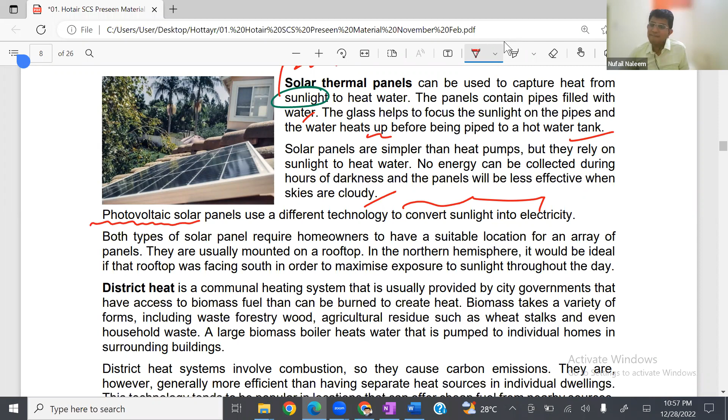In the northern hemisphere, it would be ideal if the rooftop was facing south in order to maximize the exposure of sunlight during the day. But the biggest problem we'll be having is we will not be having an opportunity to use this... So I will write down here: solar panels can be developed for tropical countries like India, everything. Makes sense, Anushka? Yes, sir. So we can develop a solar panel for tropical countries, and I'll write down here: export. Students, we can go for the export opportunity also. That is also one factor to be considered as well.

Now the next one is district heat. District heat is a communal heating system that is usually provided by the city government that have access to biomass fuel that can be burned to create heat. Biomass takes a variety of forms, including waste forestry wood, agricultural residues such as wheat stalks, and even household waste. A large biomass boiler heats water that is pumped to individual homes in surrounding buildings.

District heat systems involve combustion, so they cause carbon emissions. They are, however, generally more efficient than having a separate heat source for individual houses. This technology tends to be popular in locations that can offer cheap fuel from nearby sources.

So one question we need to ask is, do we have biomass? Because biomass is very important—we need huge energy. For example, a city with large commercial forestry on the outskirts will be ready to supply combustible materials that would otherwise be dumped. Let me explain that even more clearly with a diagram, just give me a minute.

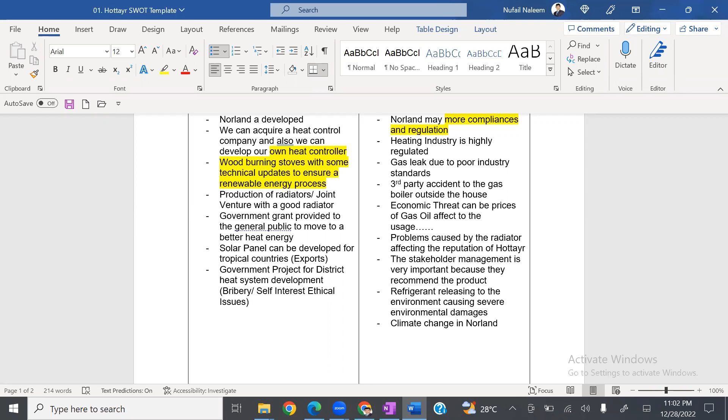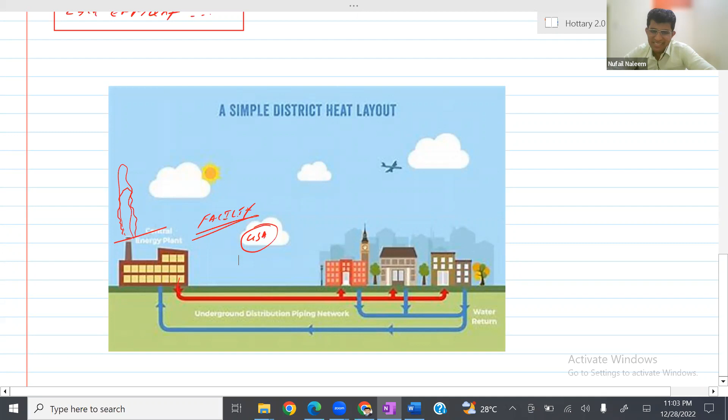Now, students, coming to the next one, which will be even easier: electric heaters. This is popular in North India, you will get it in every house. Even in the UK you may get it everywhere. Electric heaters can be freestanding or wall mounted. In either case, they're connected to the household electricity supply.

The flow of electricity through wiring, due to high resistance, creates heat. Electric heaters were popular before central heating became common. These are the traditional ones. They are easy to install in any room and flexible, since heaters can be switched on or off in different rooms according to occupants' needs. They offer convenience but are relatively expensive to operate.

I think in Doha, certain people may use electric heaters during the very cold time, so this is something present in most countries. Students, one more opportunity I can write down is development of electric heaters. That is also done.

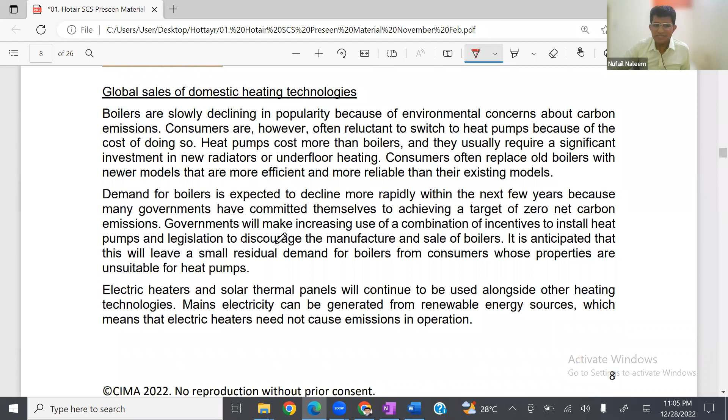Now students, this is a very important conclusion if I'm not mistaken: global sales of domestic heating technology. Boilers are slowly declining in popularity due to environmental concern over carbon emissions, so boilers are day by day reducing. Consumers are, however, often reluctant to switch to heat pumps because of the cost. Heat pumps cost 5 times more than boilers. That is the real challenge.

They usually require significant investment in new radiators or underfloor heating. Consumers often replace old boilers with newer models which are more efficient and more reliable than the existing model, also because you can get 10 degrees higher heat.

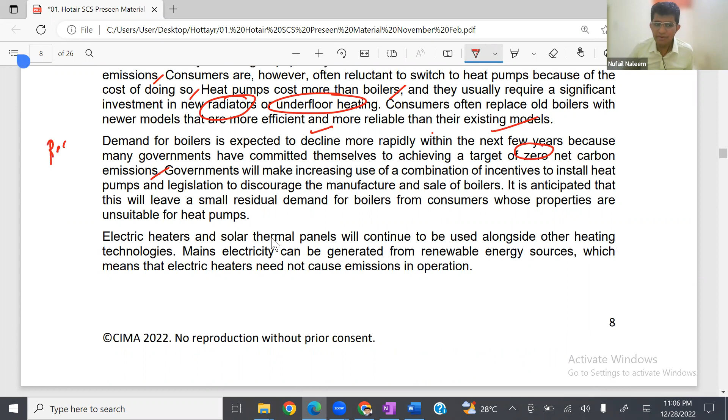Demand for boilers is expected to decline more rapidly within the next few years because many governments have committed to achieving zero net carbon emissions. So regulations are coming forward to make sure boilers are slowly taken out of the market. Governments will make increasing use of a combination of incentives to install heat pumps and legislation to discourage manufacture and sale of boilers. It is anticipated that this will leave small residual demand for boilers from consumers whose properties are unsuitable for heat pumps.

So this boiler market can end up moving from the mass market to a niche market. That is the meaning. You understand what I'm saying, Anushka? That means boilers can have a niche market, because certain houses anyway need to use boilers.

Transition can happen. Electric heaters and solar thermal panels will continue to be used alongside other heating technologies. Mains electricity can be generated from renewable energy sources, which means electric heaters need not cause emissions in operation. So that is one factor they are saying.

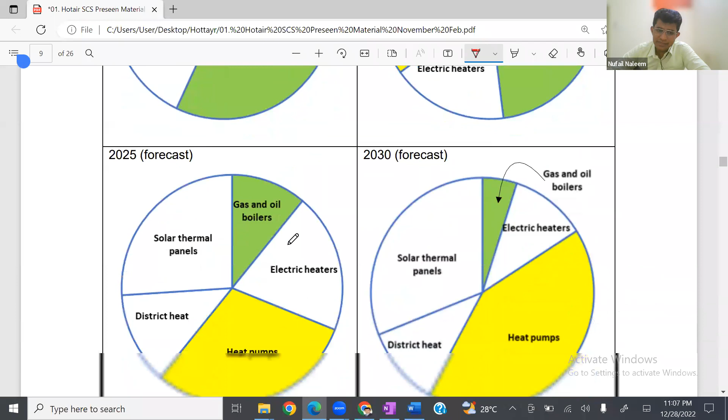Now this is the global sales chart, very clear from 2015 onward, going like this, they are saying. But I am having a skeptical issue, Anushka. They are saying electric heaters are going to increase. This is global, students, not Nolan. Are you understanding? Global, not Nolan. This is global. Understand it very clearly.

Now in the global chart, if you see, solar thermal panels are growing also. Do you see, Anushka? Now the problem is solar thermal panels can be growing in tropical countries. So we can't come to a judgment for Nolan based on this. Students, can I get a confirmation from you? This is not Nolan, this is global data. So that is one factor.

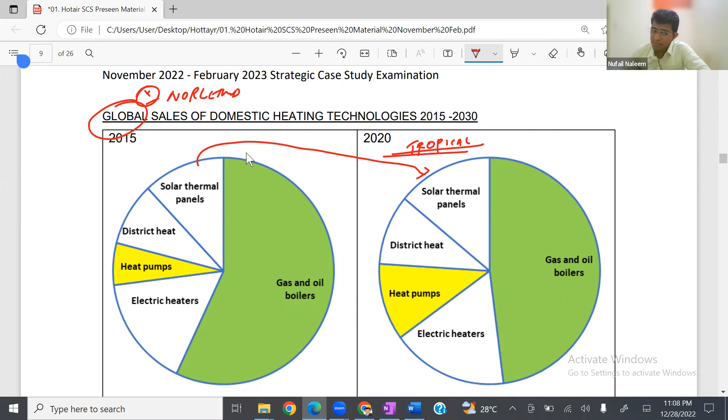And Anushka, you see district heat doesn't move much. Do you observe that? The reason is it's very tough, you need biomass and an excess level of supply of energy is needed. The heat pump is also growing, you can see, and electric heaters remain the same, just mentioning the same proportion. And the gas boilers are reducing.

But in this depiction, they're showing a slight change going toward the heat pump. My only question is, this is 5 times expensive, correct, Anushka, if I'm not mistaken? 5 times expensive.

Now the next thing is 2020-25. Currently we are in 2022, so 2020-25. I think this is a very much questionable doubt: within 5 years, can there be a mass change without government intervention? Are you getting what I'm saying? So I still have a doubt whether people will effectively shift to heat pumps 5 times faster, while district heat still remains the same, and electric heaters and solar thermal panels are increasing. But this is global data only, not just our country, global only.

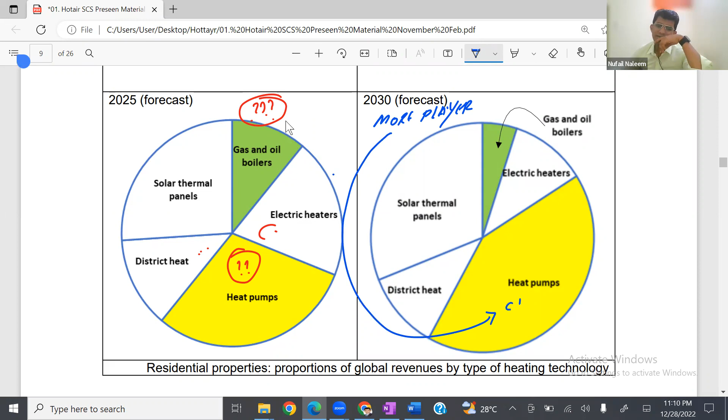Gas and oil boilers are effectively going down while heat pumps are rising. Anushka, in the global market, can there be more players driving the market? Yes, sir. So can I say that heat pumps can be cheaper in certain regions? Due to quality, they may have low quality heat pumps, so that can also come into the picture. But this is the depiction they're having. We need to be very much concerned about our country also.

Students, residential properties, proportions of global revenues by type of heating technology. Here, the promotion of renewable energy sources is expected to boost the unit sale of heat pumps more than other sustainable heat sources. Solar thermal panels are not suitable for every location, and they are not always capable of meeting the household's entire need for heating hot water. District heat requires a major investment in infrastructure, so it tends to rely on government support, generally in developed regions.

One of the biggest weaknesses I can observe is they are restricting our knowledge to 5 technologies only: solar thermal, district heat, electric heaters, heat pumps, and gas and oil boilers.

Students, my question is, can there be innovations in the market? Possible or not possible? Highly possible, right? Please write down 'innovation unseen' - there can be some innovations which are purely mentioned in unseen material. Can I quickly get a confirmation from you all in the chat box - innovations, unseen material. I believe that gives you better clarity at the moment.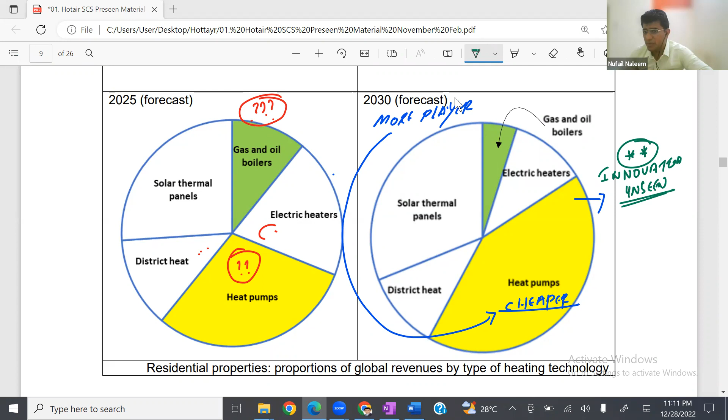Now, coming here, the promotion of renewable energy sources is expected to boost that. I think we covered that. Now, Norland's residential central heating market - let's go through this also. I'll come to Hottayr in the next class, I'll just finish the industry analysis today.

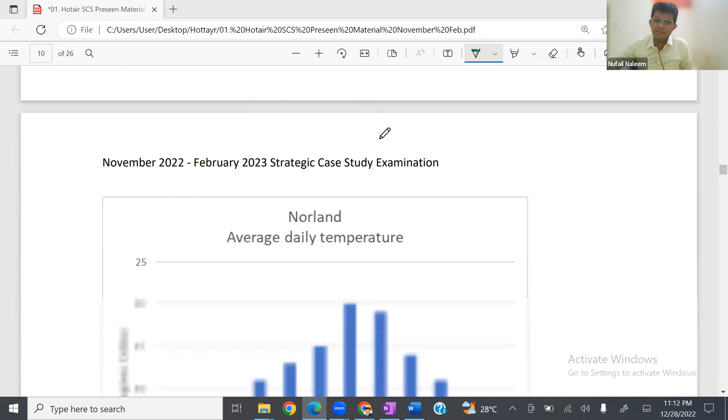Norland has a temperate climate, which has significant variance in temperature from season to season throughout the year. Students, observe it very clearly - this is the climate that is happening. It's like England. Even their summer is not a summer, it's just like a winter in a normal place.

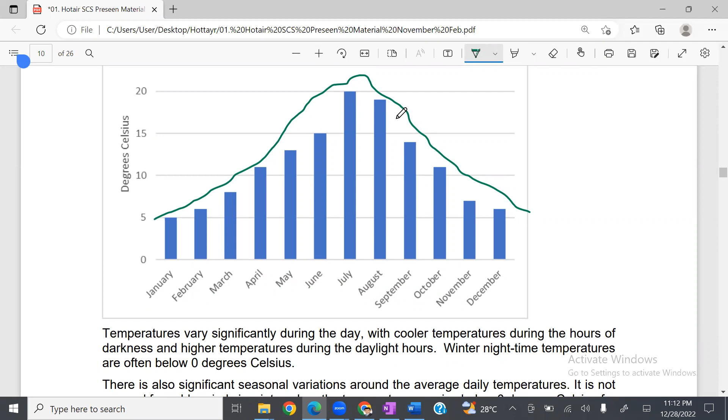Can I get a confirmation from you in the chat box if you are clear with this? It's a temperate country, so solar panel is out, anyway out, correct? It won't be effective.

Temperatures vary significantly during the day, with cooler temperatures during the hours of darkness and higher temperatures during daylight hours. Winter night time temperatures are often below 0 degrees Celsius. There is also significant seasonal variation around the average daily temperature. It is not unusual for cold periods in winter when the temperature remains below 0 degrees Celsius for a week or more. Similarly, there can be hot spells during summer when the temperature reaches 30 degrees Celsius.

So I can also say heat pump is somewhat good also, what do you think, Anushka? Yes, sir. But the thing is, we need to have an upgraded heat pump rather than going with the first generation heat pump. There can be second generation, third generation heat pumps, like how computers develop. The first generation heat pump will be inefficient, but the second, third, and fourth generation - can there be development?

Of course. Most householders heat their home from mid-autumn until early spring. Heating cost can be a significant part of a typical Norlandian family budget - it's a need. Now, students, if people living in the Middle East need to understand, during the summer they need AC. Without AC you can't stay - at 50 degrees you will get grilled.

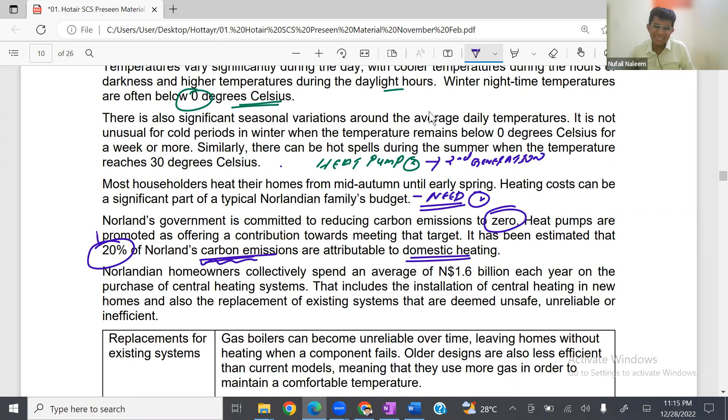Big bang means like demonetization. Immediately you ask people to change, for what sir? 20% carbon emission here. So the government can immediately tell the household to change? It will be a bigger issue, so I cannot say the government can effectively go to zero immediately. I can't agree with such an optimistic government policy.

And also Anushka, there are always chances, right? Government changes are also possible, no, Anushka?

Norlandian homeowners collectively spend an average of 1.6 billion each year to purchase a central heating system. So the market size is 1.6 billion each year. Students, I'll write it down here — one very, very important point, market size. It's very important for a financial accountant. 1.6 billion market, understand it very clearly.

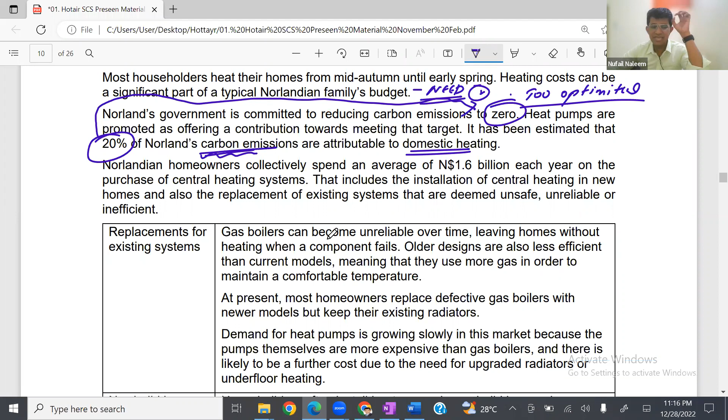Now students, coming to the next one. That includes installation of central heating systems into new homes, and replacement of systems deemed unsafe, unreliable, and inefficient. So all the costs are there. Replacement of existing system means you already have a heating system and you are going to replace it.

Gas boilers can become unreliable over time, leaving homes without heating when components fail. Older designs are less efficient than current models, meaning they use more gas to maintain comfortable temperature. At present, most homeowners replace defective gas boilers with newer models but keep their existing radiators. Demand for heat pumps is growing slowly because the pumps themselves are more expensive than gas boilers, and there's further cost due to needing upgraded radiators. So demand is always slow.

Correct, no Anushka? So that pie chart they gave is wrong, right Anushka? Do you think within 5 years there can be a huge shift? I doubt it. So students, this is one way it happens — replacement.

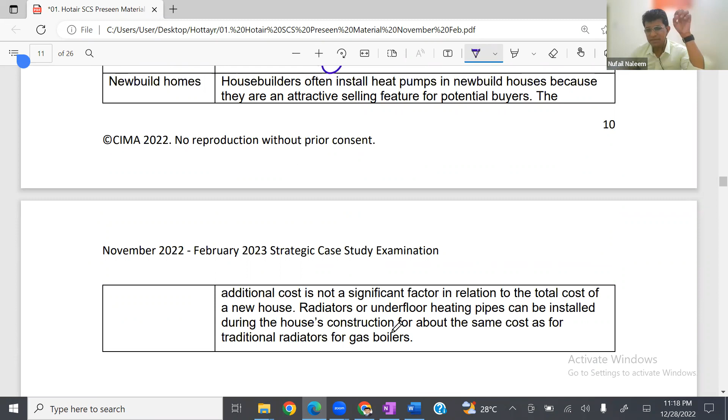And the other one, newly built house. House builders often install heat pumps in new build houses because they are an attractive selling feature to potential buyers. The additional cost is not a significant factor in relation to the cost of a new house. Radiators and underfloor heating pipes can be installed during construction at about the same cost as for traditional radiators for gas boilers.

So students, new build house and existing building repair — these are the two major points happening in the market. How do people spend? One is replacement — they spend on replacement of their existing gas boilers. The other, in simple language, is newly built house.

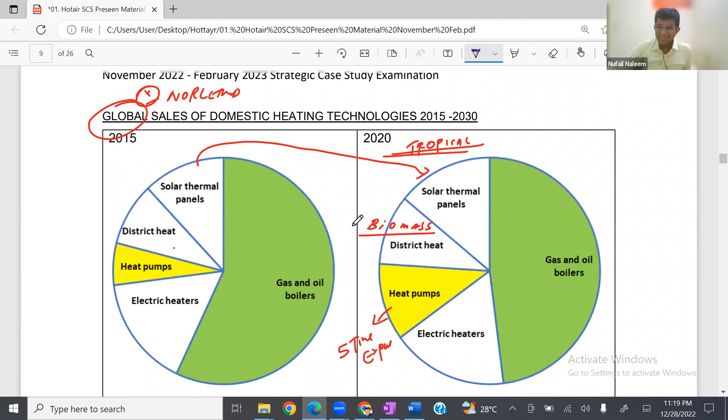Now students, just to make sure, industry data analysis is over. Now I want to come to Hottayr — I'll do it in the Friday class, okay Anushka? Or else we will do it till tomorrow morning. So students, I just want to ask — are you fine with the industry statistics we have? It's a very, very technical, scientific-based industry, and you need to understand the concepts and ideas very clearly, students, which is very important.

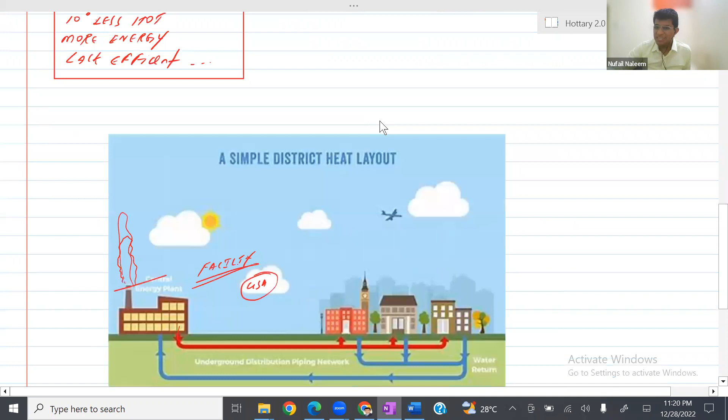So I'll just show this product decoding — gas boilers, wood burning stove, and then we went with the heat pumps. If I'm not mistaken: evaporator, compressor, condenser, and the valve. If you observe, it's 5 times more expensive than a boiler, and the heat is less at the moment. Then the district heating system is for government proposals, and in the market we also have general electric heaters. So these are the major products we have in our market.

But I believe everyone has got clarity now to think as a finance manager. Correct, students? Yes, sir — the price is the biggest challenge for the consumer to change from gas boiler to the other one, so that is one bigger factor. Just to make sure, Anushka's doubt is about seasonal demand, right Anushka?

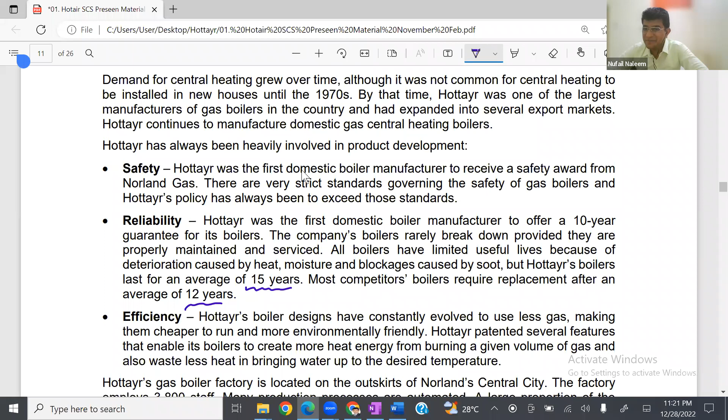So one thing is, Anushka, I'll be very transparent here. They are saying Hottayr's boilers last for how many years — 15 years, sir, 15 to 12 years. So is it seasonal or is it capex? It's a capex, right Anushka? Understand what I'm saying — like a lift, if you're going to buy a lift, there is no seasonal demand for a lift, no? 10 to 15 years, it will go.

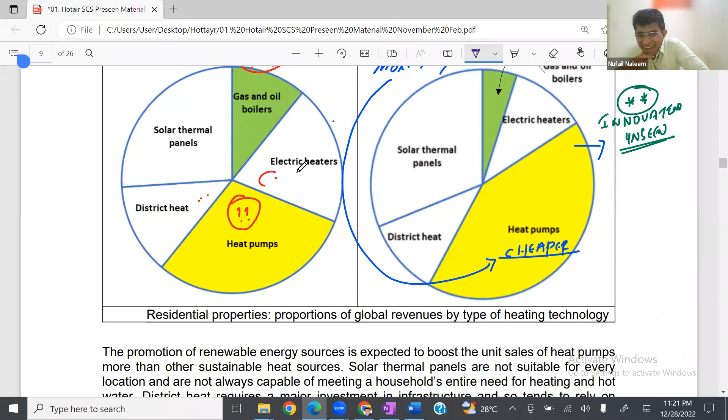So the problem is different with this other class - you need to understand we don't have seasonal buying here. Once a customer buys, he'll buy again after how many years? 10 to 15 years. Now my question is, this pie chart is wrong - how can people effectively throw away a product that can be used for 15 years unless a government comes and interferes? Are you understanding the logical idea here, students? Can I ask you a very open question, Anushka?

You have a Toyota Corolla car. You can use it for 30 or 40 years, or pass it to the next generation. The problem is they're saying Tesla has introduced electric cars - will you effectively throw away your car and go for an electric car immediately just to save the planet and be a good human being? No one will do that. So students, get that clarity very, very clearly.

And our country is one which has heat and cold, but we can experience climate change anytime.

So students, any questions for the day? I'll ask from you all. I have a question, sir - two questions. The first question is pertaining to why the heat pumps are expensive. Is it because of durability, since customers buy it after 15 years or get replacements?

Because of refrigerants, Priscilla. Refrigerants are very, very expensive. If you observe, gas boilers don't have refrigerants - they generally run on petrol, gas, something like that. And Priscilla, do a small analysis and see refrigerators are very expensive in your house. Have you observed that? Yes sir, refrigerators are extremely expensive. And if you observe, other items are very cheap - television is cheaper than a refrigerator, correct? The main reason refrigerators are expensive is the refrigerants they use, which are very, very expensive.

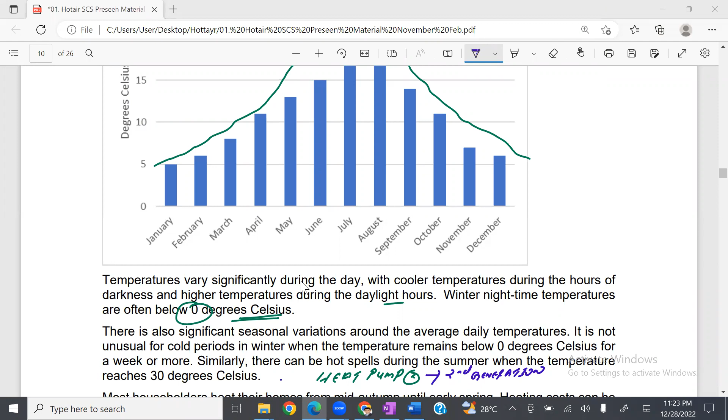My second question is based on the chart showing people moving towards heat pumps - you said it doesn't look realistic. However, globally, for example in the UK, the government is giving subsidies and grants to people to buy new homes, and builders are using these heat pumps for new build homes. So there's an influx of people now being able to afford new homes, and I think that's the initiative the government is going for. So could there be a shift in demand for heat pumps in places like the UK, maybe not Norland, but globally?

It depends on the government policy and the stability of the government, in simple language. Because Priscilla, Northern Ireland is also part of the UK, right? And if you speak to people living in Scotland or Wales, they are not having the same privilege as people in England. Correct me if I'm wrong. That's right - so your judgment is wrong because the entire UK is not experiencing it. Are you understanding what I'm saying? Yeah, that's true, it makes a lot of sense. Yes it does, thank you sir.